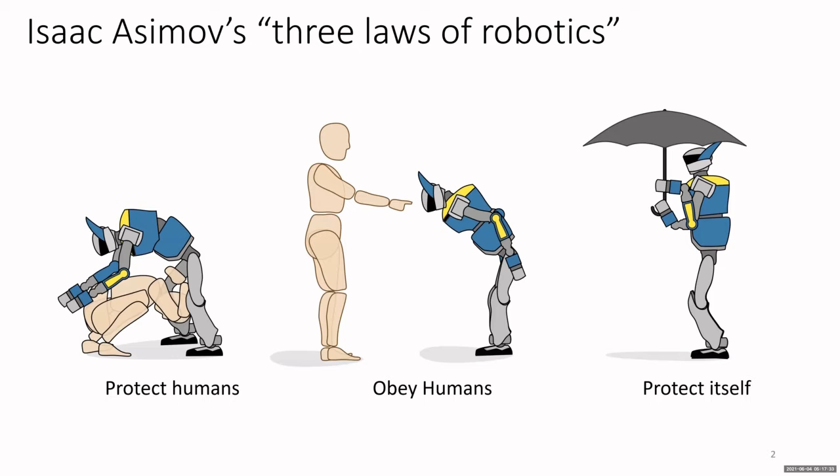It's a little bit provocative title because, yeah, it refers to the 3 laws of robotics that are really famous for the science fiction. So the laws are to protect humans, to obey humans subject to the previous law, and to protect itself subject to the 2 previous laws. These laws are rubbish. Actually, even Asimov, who made these laws, the point of his work is to show that these kinds of rules cannot work. So it's more like a philosophical thing.

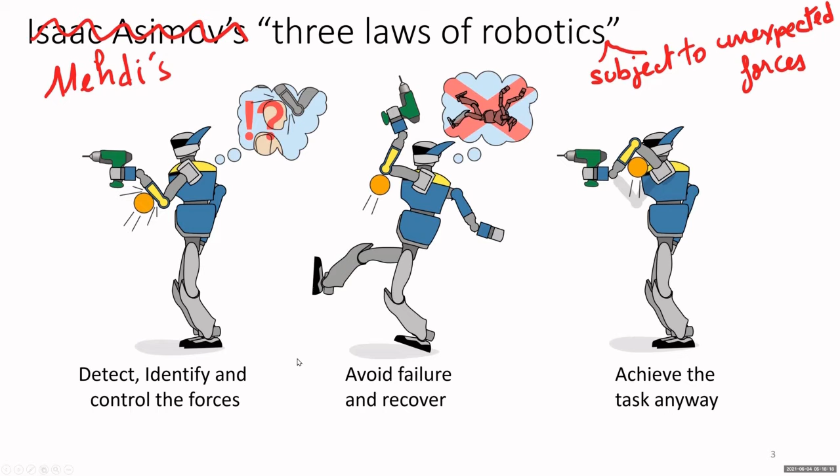But I like the idea of having the laws, so I want to make my own laws. If we have robots that are subjected to unexpected forces, my 3 laws, which also have priority, are that if an unexpected force happens, we need to detect it, identify it, and control it. Especially if we think, I mean, in the context where there might be humans around. So that's the first rule.

The second one is to avoid failure and to recover, subject to the previous one, because safety is more important. And the third one is to try to achieve the task anyway, and that's the least priority. But if we can achieve it, it means that we have completely rejected the disturbance.

So for our case, I will talk about our robots which have no torque sensor. So I'll present a couple of methods that suit our robots. I think they can extend to robots that have torque feedback quite easily, which could maybe even increase the performance. Yeah, for every law, there is a different loop, I could say: the detection, the control of the forces, the recovery, and the task achievement have their own control loops. I will not present full solutions for that. I don't think that exists yet.

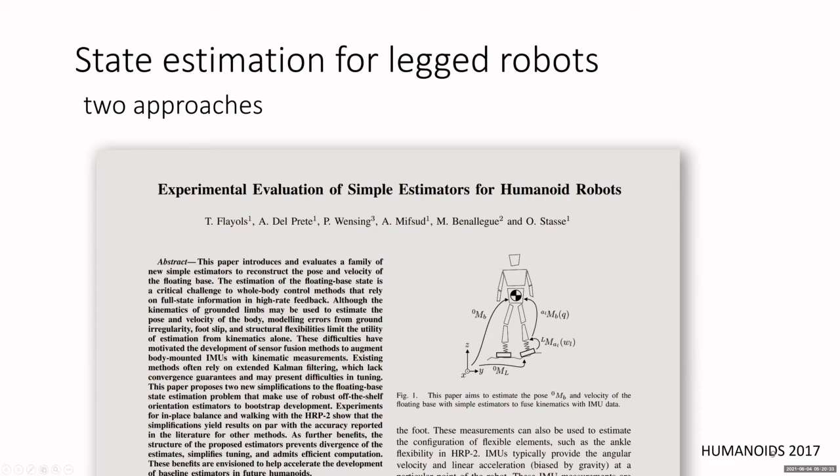I will present some estimation method here for the detection and identification of the forces, some estimation in the case of highly dynamic motion, and the closed loop control that allows to achieve the task subject to the disturbances. So for the first one, I want to talk about a paper that we did a couple of years ago about experimental evaluation of simple estimators for humanoid robots. And the word simple was really important in this paper because we were mostly comparing kinematic estimators that use IMU, encoders, maybe contact information, but it stays at the kinematic level. But I have also developed a dynamics estimator, and this is the one that I will talk about today.

The thing is that this estimator with the complex dynamics was producing higher errors than simpler ones, even if it was computationally more costly. It's not much higher, just a few more millimeters, but yeah, the simplest ones were giving smaller errors in the kinematics estimation. I'm not happy about that, but I think I can improve it, but it's not the point. What I want to present is I would still promote it even if it were the case, because being accurate or precise is not enough to guarantee the quality of the closed loop control, especially in nonlinear dynamics.

In linear dynamics, we have the separation principle where we could separate the estimation and the control. In nonlinear control, you need to deal with closed loop dynamics, which is not necessarily stable, even if the estimation and control are stable independently. So yeah, more properties like stability and smoothness, and maybe not being too sensitive to errors, are necessary to guarantee the quality of closed loop control.

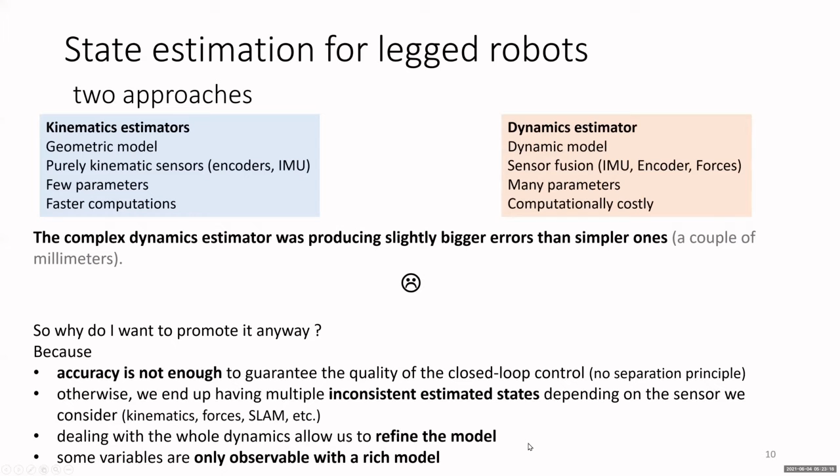And I think that's weird because we have just one single system, so we should have one single state. So that means that we have to refine the model to be able to rebuild the same state, given all the measurements that we have. And the last point, which is the most important in this talk, is that some variables are only observable with a rich model. So here I present the estimator that I developed through several publications.

And so it's a single state estimator that takes all the available measurements on our robot and builds floating base kinematics. And it also gives contact force information if they are not available with force sensors. We have even shown that we can stabilize the robot using this feedback without the force sensors. And in 2018, I have shown that we can also get other external forces that are not measured, that are not modeled, that are not contact forces.

So the idea of the experiment was to ask the robot to perform a task with its hand. Its hand has a force sensor, but we don't use it. We just ask this estimator to get the estimation of the forces, and we use the force sensor of the hand as a ground truth.

And you can see that we are able to rebuild the forces and the moments of this contact, this external force, rather accurately, especially in the forces, maybe a little bit less in the moment, just using the IMU, the force sensor at the ankles, and the encoders.

And here we show that we can even rebuild the axis that is the closest to the contact, given these measurements. And this axis has 7 centimeters of error between the contact point and this estimation. So we can get also information on the application point using this estimator.

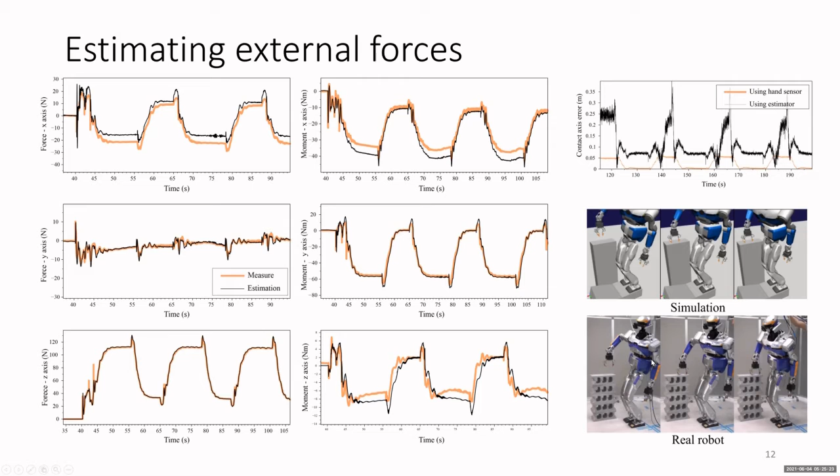Of course, it is limited because it will only give you the resulting external force. So if you have two contacts or two forces, it will not be able to distinguish them. But the point is, we can simply see it as transforming the whole robot into a giant force torque sensor.

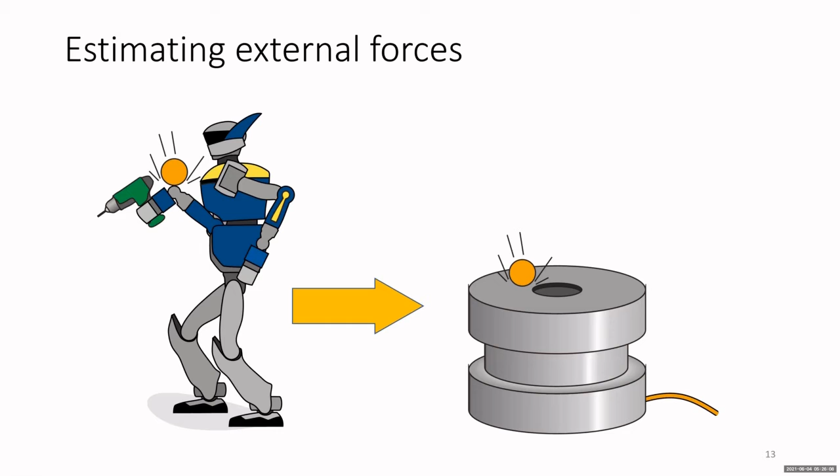And this is possible thanks to a model-rich estimator that is able to not only use the redundancy that lies between the force sensors and the kinematics, because the force sensors will give the forces and the forces will give the accelerations of the center of mass. So there is redundancy between the force sensor and the kinematics. Not only it deals with that, but also it's able to have new observable states thanks to this coupling.

So yeah, this work is being extended. It's been a couple of years that I haven't worked on it, but I think that we can improve it with more efficient implementation, better integration with absolute position and torque sensors, odometry, etc.

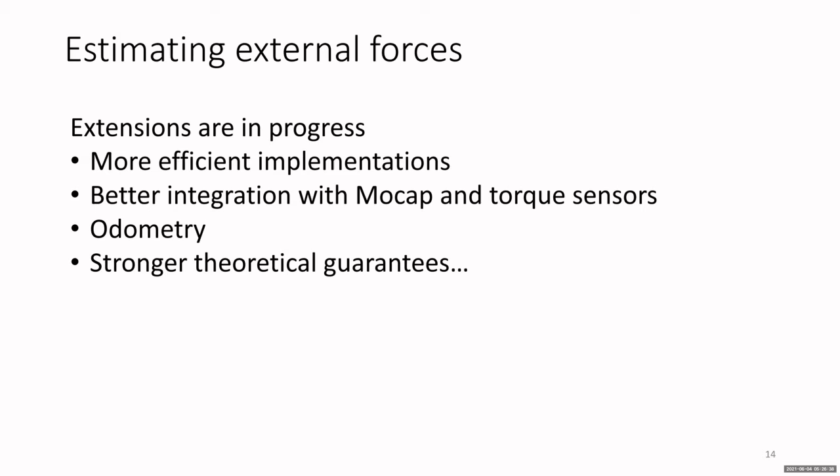But I think you would be right by saying that the precision is important. Actually, I'm not saying it's not important. So precision is important. And in the case of our observer, it relies a lot on the dynamic model. So if the model is wrong, the precision will be lower, and the modeling error will show up more in dynamic motions. So I think that's right.

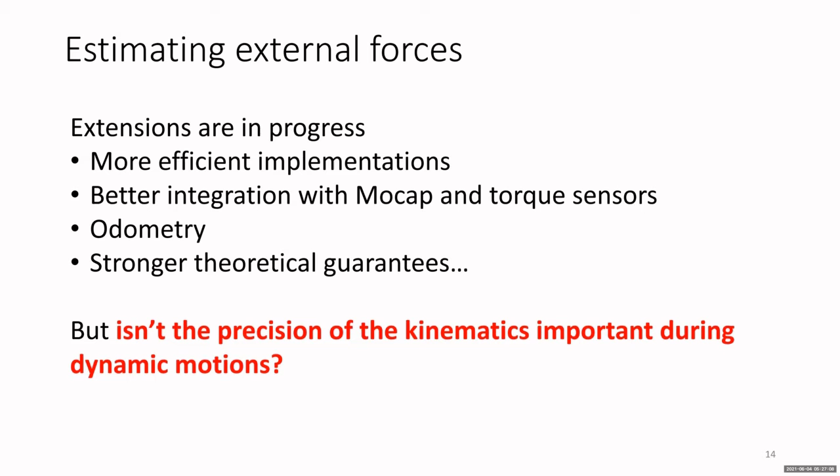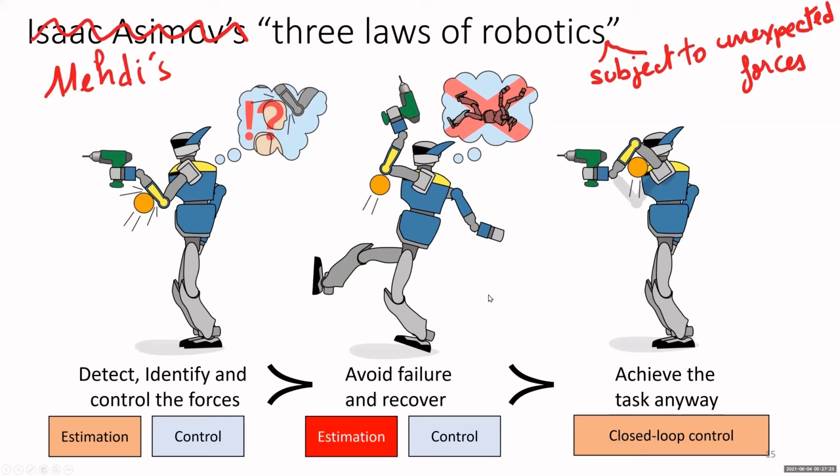So that's why I will present another kind of estimation framework for the case of dynamic motion. And I put it here because that's usually the context where we need to avoid failure, at least for humanoid robots, where we need to recover balance.

This is another estimator. The idea is, let's suppose we know what is the fixed point of the robot. The instant fixed point is, at each instant, what point in the frame of the robot, or even not really in the robot, could be like between the feet, is not moving; it has zero velocity. So usually it's around the contact points. We can consider, for example, the ZMP. So the ZMP could be considered as the fixed point.

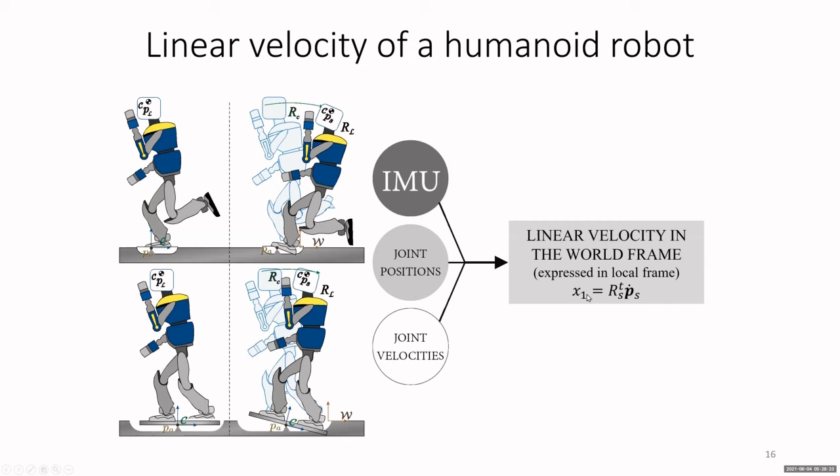If we know the fixed point, just using the IMU, the encoders, and the joint velocity, we can rebuild the linear velocity in the world frame expressed in the local frame. So let me call it x1. And let me call x2 the direction of the gravity in the local frame. So this gives a kind of roll pitch, like 2 degrees of freedom of the orientation.

So the state dynamics is actually really simple. S here is just the skew symmetric operator, so that's just the cross product. And I would define a really simple state observer, like six rows, 3D vectors. So in code it's just 2 lines of code, these 2 lines of code.

And with this estimator, let's build the vector of error. The vector of error has dynamics that looks a little bit complex, but if I change the variable by looking at the error in the global frame, I end up with this dynamics. So this dynamics is linear. These are 3D vectors too. These are errors, so when it's 0, it means that we have a correct estimation.

It's stable. So it's globally exponentially stable. It means it will go to 0. But what is important here is to see that it is autonomous. It means that it doesn't have any input. It only depends on the state, on the error itself. It means the error dynamics would be the same whatever the motion of the IMU. Whatever the IMU is doing, the estimation will converge in the same way to the correct one.

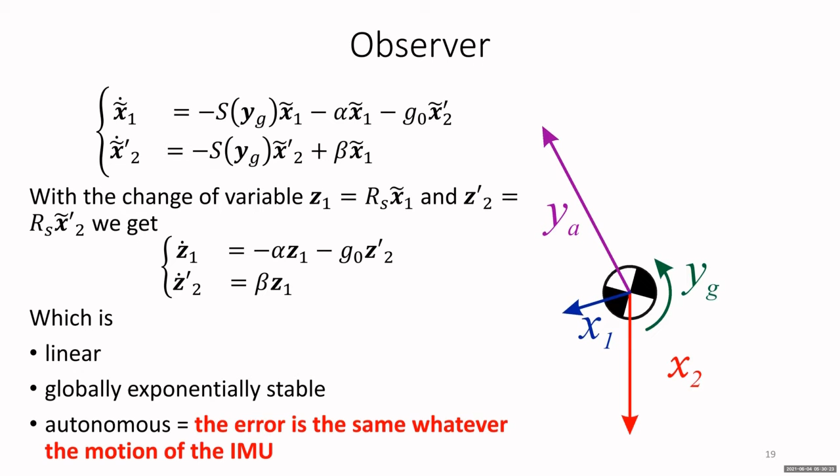So it could be any kind of dynamic motion, any kind of impact motion. So for example, here in simulation, we make this simulated robot oscillate, then somewhere around here, we make it fall, and we follow the vector of gravity in the local frame.

So here we can see the fall. Here also we can see the fall. So X and Z components are showing the fall. Here there is a big impact. And here I compare several estimators. So the one that I presented here is this one, the red. And we see that the error is actually really, really small. And during the fall, it doesn't increase a lot. It's maybe the same order of magnitude as the error during the oscillation.

So this is because the fall was respecting the hypothesis that there is a fixed point that we know. So we just use the force sensor to get the ZMP, and with the ZMP we can rebuild the position of the fixed point. So of course it depends on this assumption. If I don't know the fixed point, or if it's wrong, or if the robot is slipping, it would be less precise, but the error would be filtered because this estimation is going through a complementary filter. So if there is a short slip, it will be filtered.

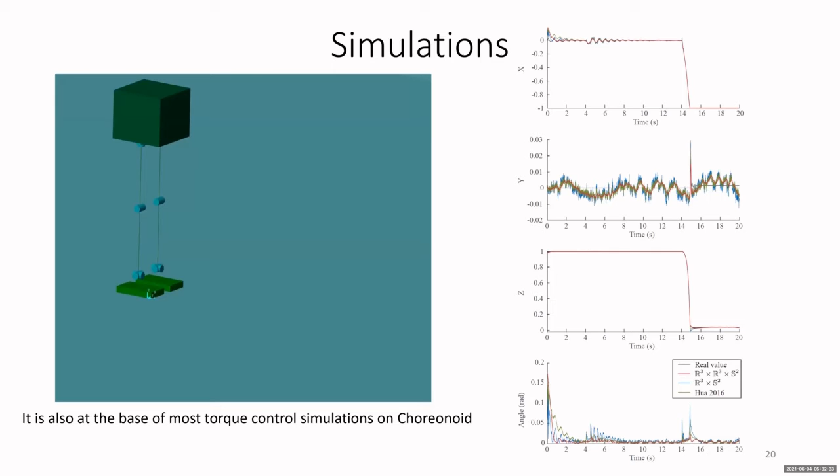And anyway, that's better than the other estimators that just consider fixed points or use the forces to predict slipping just to decrease the confidence that they have in the contact points. So we didn't make our robots fall, so I just show some results in closed loop with this estimator. Of course, it would work without issues.

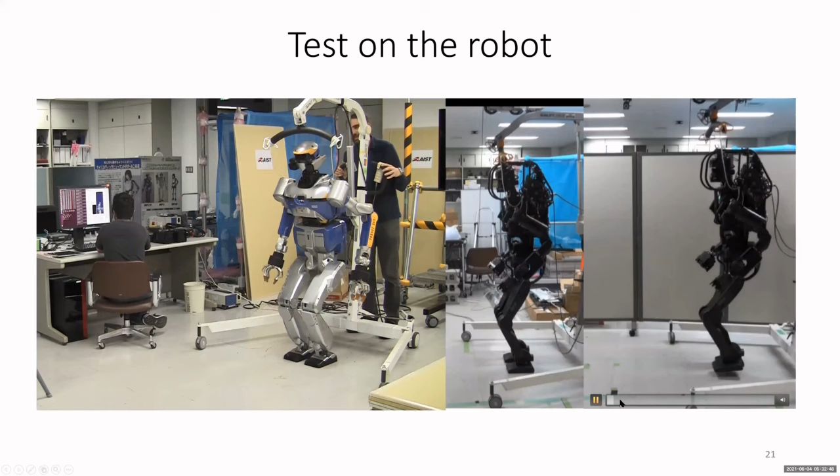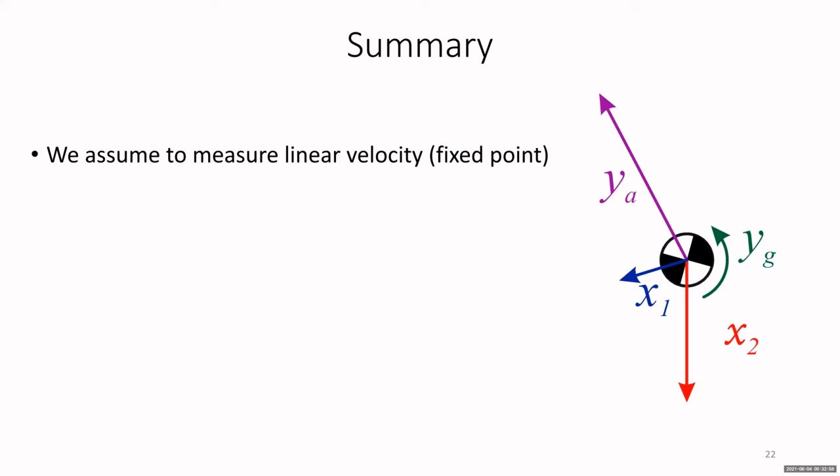So in summary, we just assume that there is a fixed point that gives us the linear velocity. Better noise filtering is obtained through this estimator. We have proven Lyapunov convergence, and to my knowledge, this is the only estimator that has proven Lyapunov convergence in humanoid robots. There are other estimators which have local convergence. This is a global convergence, so it's a really strong guarantee, and the error is autonomous.

So we are also presenting in Transactions on Automatic Control a generalization of this estimator to nth order filtering, which can increase the rejection of noise. That's currently submitted.

So now let's move to the third goal, which is to investigate how we can achieve the task in the presence of these unexpected forces. Throughout several publications, we have presented the torque control approach that uses robots without torque feedback. One key idea is this: this is the reference acceleration coming from the QP. We integrate it and get the error in velocity between the integral of this reference acceleration and the current velocity obtained from the robot. And this integral term allows us to correct for errors in the computed torque.

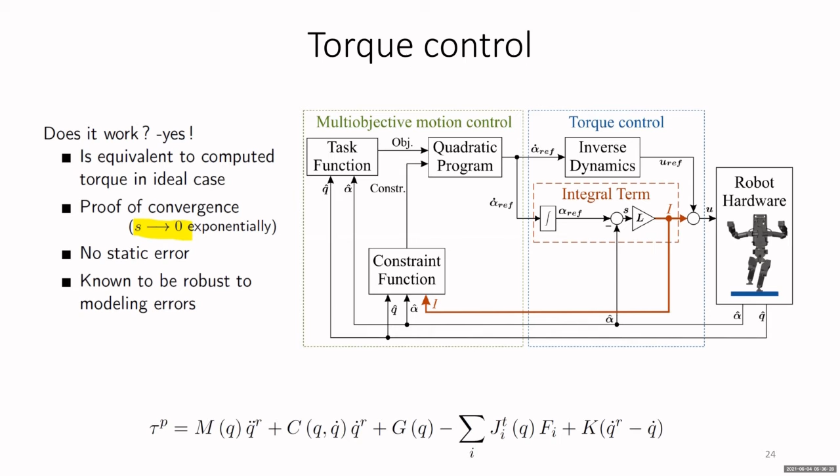But since S is computed through the reference acceleration that takes into account the position and the velocity, we can prove that this amounts to having the convergence of the integral of the joint position error. So it's not only the position error going to 0, but its integral is going to 0. That's known to produce higher robustness, and to give no static error, even in the case of modeling error in mass distribution or this kind of stuff. The guarantee that the integral of the joint position error goes to 0 is really strong, especially in the case we are dealing with here, where we have disturbances.

So do we really want that? Actually, what we want is the convergence of one or several specific tasks. And we have to acknowledge that integral terms can be dangerous. For example, if the robot hits the wall and there is an integral term, it would just try to break the wall. So we have submitted to IROS a series of safety measures, an anti-windup based on a QP that guarantees that the integral term will never exceed the given values, and it does it in an optimal way. It only reduces the torque that is exceeding the value, but doesn't decrease the performance of other components of the motion.

We have also presented a leaky integration scheme with a second order filter that allows us to target specific kinds of disturbances. So instead of using just simple integration, we can have a quick integration for stiction and really impulsive disturbances, and a slow integration that can deal with the modeling error. And finally, we presented the null space compliance that I will present here briefly.

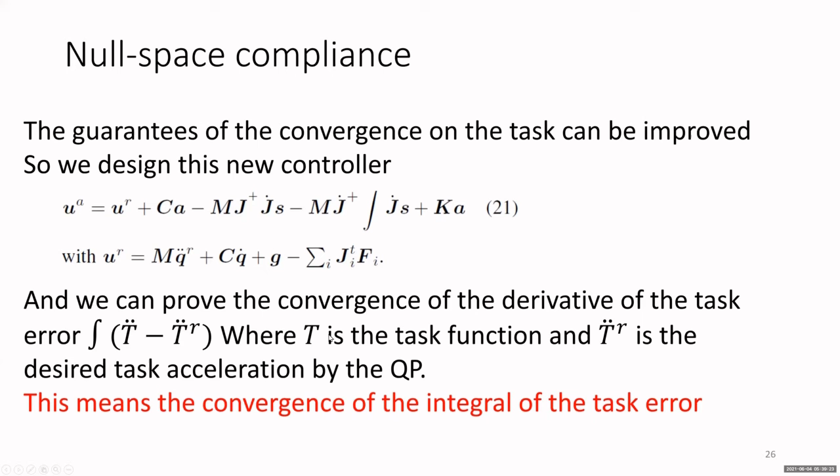But similarly, since this comes from the QP, the QP is aware of what is the desired one. So it means that we have the convergence of the integral of the task error itself. So for example, if I want a 6D pose task, the integral of the 6D pose error would be going to 0. And so that's really the same kind of proof of guarantees of convergence, but only on the tasks. So this allows us to make the remaining degrees of freedom compliant.

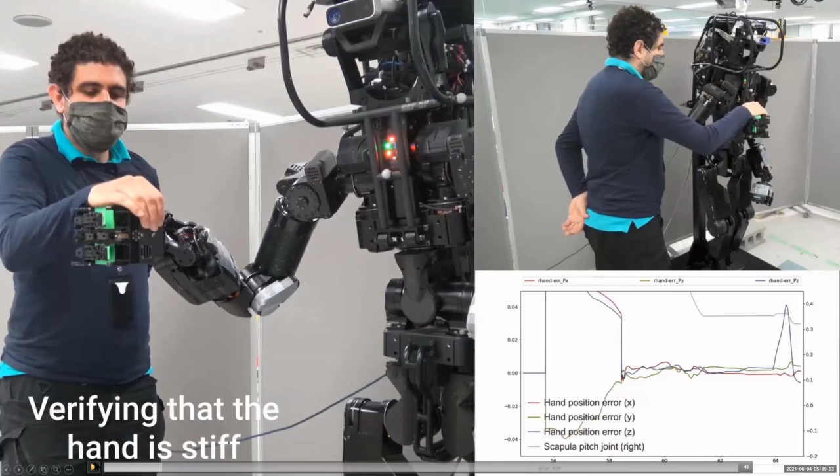So this is how we can demonstrate it. So this is our robot HRP5P, which has no torque feedback. So here it's on a stand. The stand is not perfectly rigid. So when I say the hand is stiff, but actually you see it going down and up, it's mostly the stand that's moving. So here, since we are applying really strong forces on the robot, we are not dealing with balance. We are just dealing with the task itself. So we put the robot on the stand.

So here the task is really stiff, and also the null space is stiff. So if I activate null space compliance, I have the same property, it's the same stiffness for the task. But now the null space of the task is compliant. It's not really easy to move it, because this is a passive compliance, so I still have to deal with the friction. And it's a really high gear ratio robot. It's a really powerful robot.

But what I want to show is that I can move degrees of freedom, and at the same time, the hand remains in place, even if I move the other degrees of freedom. So here the arm has 9 DOFs, and the task is 6 DOF. So I have 3 DOFs of null space, but only 2 are easy to move. The third one is really complicated because we have high friction and we don't have a big leverage arm.

And actually, we can also have fun and combine this with some admittance. So now we can have at the same time different compliance, either in the task space or in the null space. So here I can move the null space, and this remains in place, or I move the end effector itself, and it follows. So yeah, we can have fun and combine several kinds of controls.

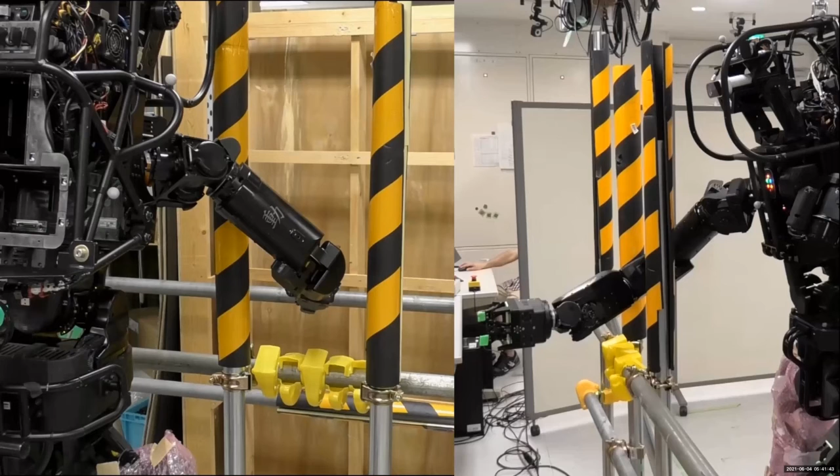And so this can be also used for... So this is a really recent result that we got. It's not even in the submission to IROS. We can use it for moving. So the robot is asked here to perform some trajectory in the space, but there are vertical bars. So the robot is not aware of the bars. It has no measurement of the bars. It's completely blind, and it has no feedback of the presence of the bars, even if it touches them.

But still, the robot is asked to do it, so it collides completely with the bars. But thanks to the compliance, it's able to reach the task. So it's not perfect, of course, because during the disturbance, the task error increases. But thanks to our control, we know that this task error will go back to zero quickly.

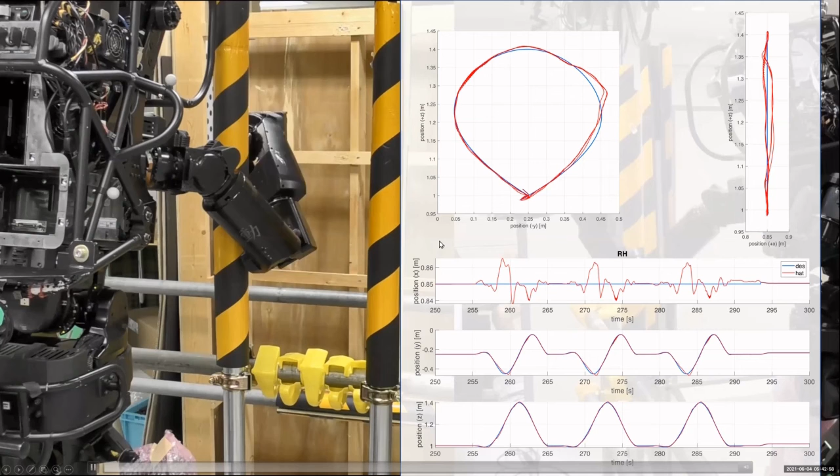So I can show you also the trajectories here. So this is the reference trajectory that is required here from the robot in the space. So this is y, z, and this is x, z. Maybe here it's clearer. So this is x, y, z reference in blue, and the actual position in red. And we can see that there are some errors here that happen just because of the disturbance, but the impact was compensated here, and the task could be achieved.

And more importantly, we didn't break the robot, we didn't break the environment. And with this kind of robot, especially HRP-5P, this is completely impossible with position control, except if we modify it in a really extensive way.

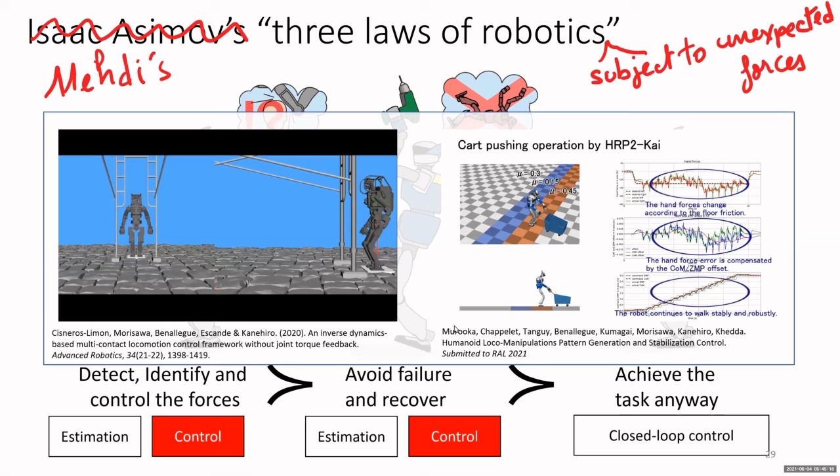So thank you very much. I'm sorry for this maybe short presentation, but that's it. There are still many missing bricks to achieve these laws, and I would be happy to discuss that with you.

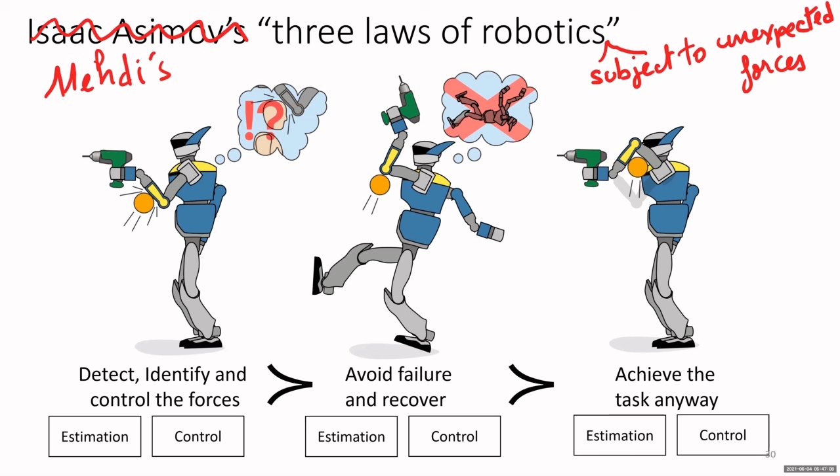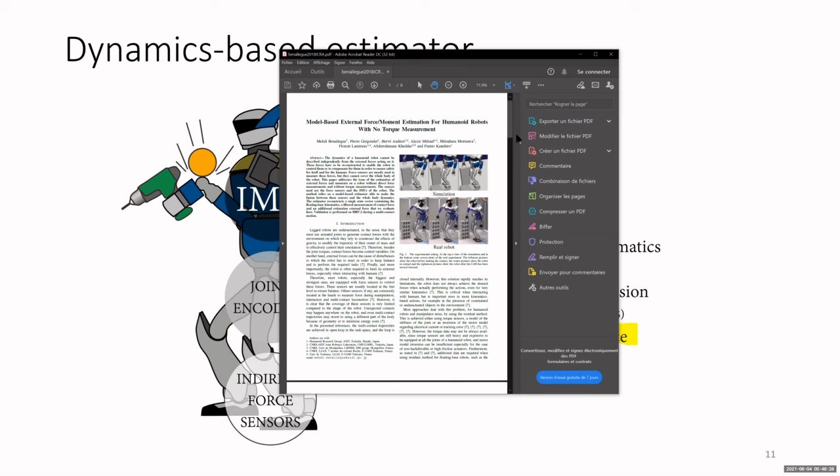I don't know if I have the results here. I think I have them here. Where is it? So with the same experiment, can you see the paper? Oh, yes. So in the same experiment, I also tried without the force sensors. Yeah. So here we can get 1 force and 2 moments. That's what I could get.

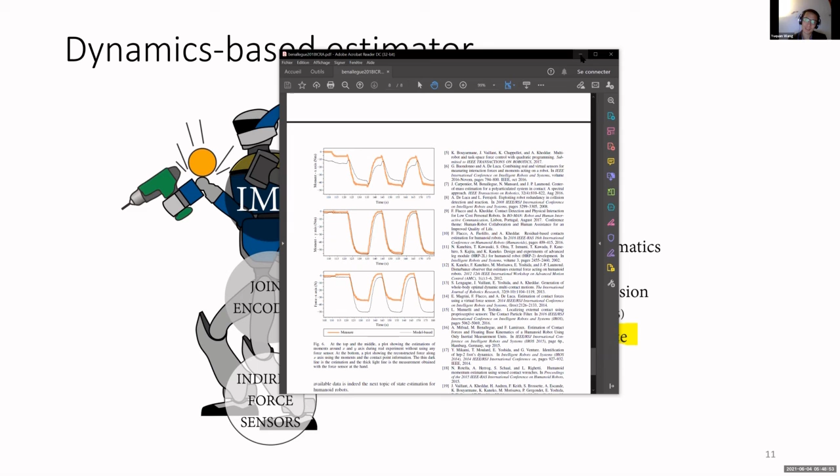Okay. Great, thank you for the answer. I will check the details in the paper in the future. Yeah, please. And if you have questions, don't hesitate. Yes.

Maybe one more point: you mentioned that the dynamics approach can produce bigger errors. Could you please briefly answer why that is? Where does the uncertainty come from? Does it come from the uncertain dynamics model, or what? So for that specific experiment, I know that the IMU gyro had some bias.

This allowed me to make my model more complex and add the bias estimation, but this hasn't been released yet. So usually if I find a big error, it means that the model is wrong and needs to be refined. I think it's interesting because it allows a nicer model, and the nicer model is a better predictor of the dynamics of the robot. I have been using the models for estimation and also for control, and we have shown that the prediction is not that bad if you refine your model.

Okay. So maybe one of the possible contributions is from the uncertain models. Yeah, the uncertainty in the contact model is the biggest one. I worked a lot on that, but there are still some modeling errors that need to be tackled.